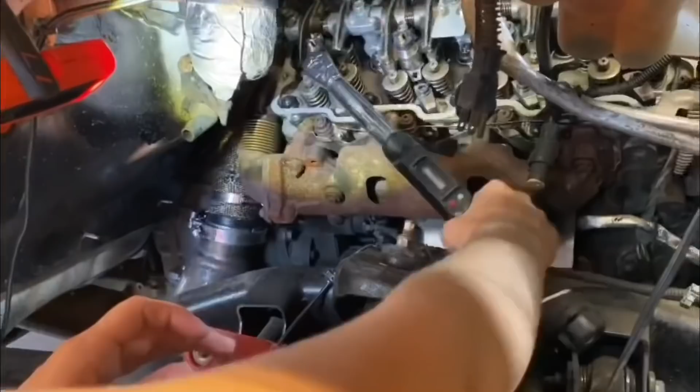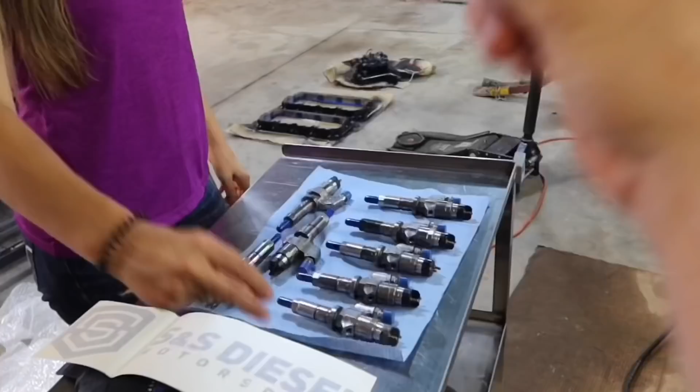We're gonna go ahead and get you guys up to speed really quick. We installed the 100 over S&S Diesel injectors. What that means, guys, is I basically took my old injectors out of this truck. I went ahead and purchased 100 over SAC injector nozzles from S&S Diesel as well. And what I had them do essentially is take those 100 over nozzles and put them on my injectors.

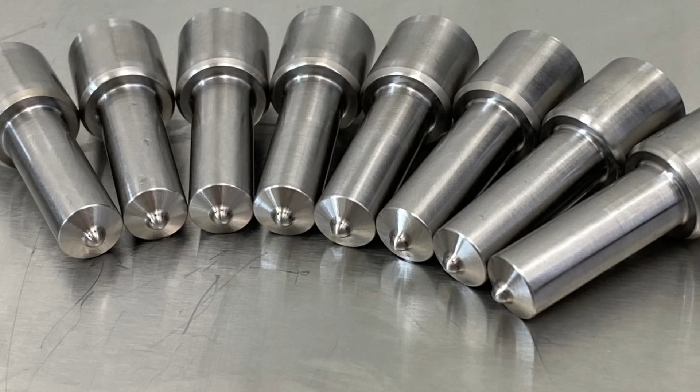We're gonna make this sort of a learning experience, sort of a science experiment, so stay with me on this one right here. If some of this stuff doesn't make any sense to you, if it's another language, I think you'll still be able to take something out of this, especially for you diesel owners, or some of you guys that just want to put a little bit more power to your truck.

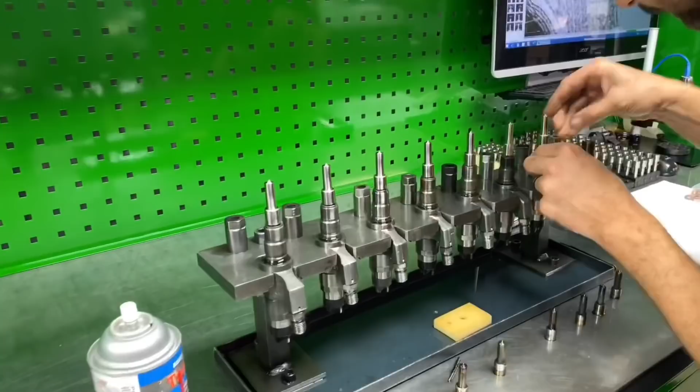So in most cases, a lot of guys just buy the injector nozzles and they just put them right on their diesel injectors and then put them back in their truck. Of course it's going to be more cost effective. Let's be honest, a set of nozzles are going to run you, mine were about $1,200. You're going anywhere from a range of $600 to $1,200 depending on the size of injector nozzles that you're trying to go with. Most guys just buy the nozzles, put them on their injectors in their garage, and then put them back in their truck. That's all fine and great, but I do question that right there.

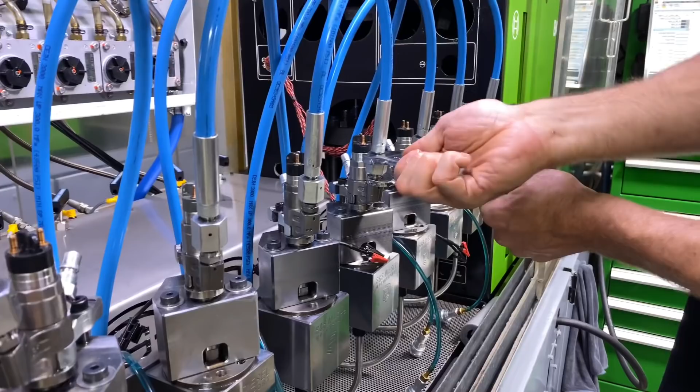So the team at S&S, those guys are so awesome. They were able to send me some footage from their shop, and I'm going to collaborate that here in this video and show you guys some of the data and science behind all of this. And is that even worth it?

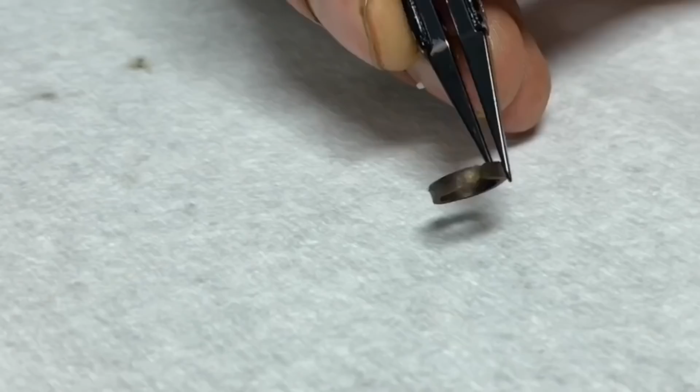Now, this is also a really good reason why you guys should not just install injector nozzles on your injectors and then slap them back in the engine. This right here is a cracked high pressure seal, and this is while they were actually rebuilding the injectors. They noticed that there was a crack inside the seal right here, which would cause a no start naturally. So this is a great example why it's a good idea to have S&S install the nozzles for you instead of doing it in your garage.

So watch till the end of the video, see the results. In real time, you guys are actually going to see the injectors that we ripped out of this truck right here, which is already put together, as you guys can see. And stay tuned for some more awesome videos on this one.

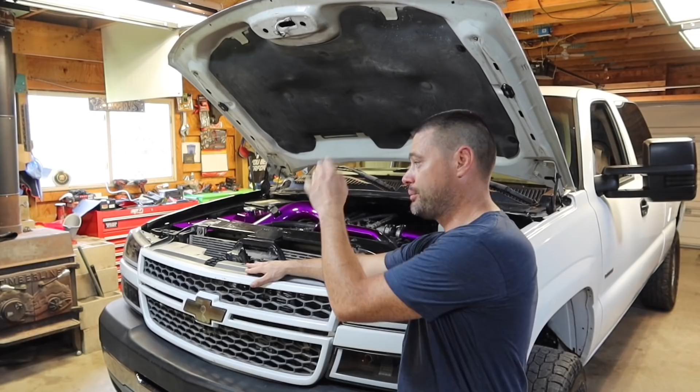In the end of the video, we're going to conclude: is it better to just swap them out in your garage and put them in your truck, or is it best to send them out to a professional, have them calibrate those injectors with the new nozzle tips, and remanufacture the injectors and bring them back to you? I know it's a lot more expensive, but is it really worth it?

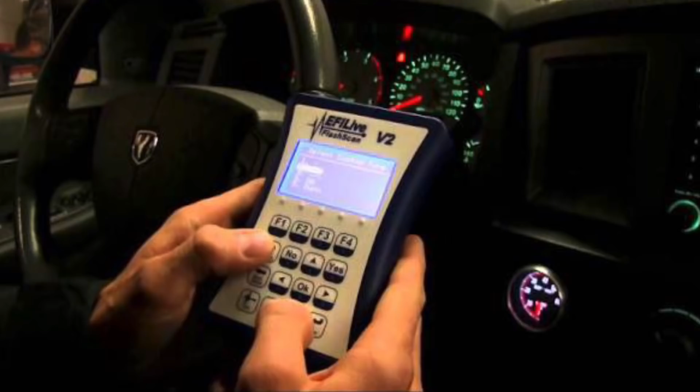In theory, producing more power by increasing fuel flow sounds simple enough, and there are two ways of doing it on most diesels. The first is electronically, by cranking up the tuner and letting the computer do the work for you. The second is by physically delivering more fuel by installing larger injectors or modifying the injector tips.

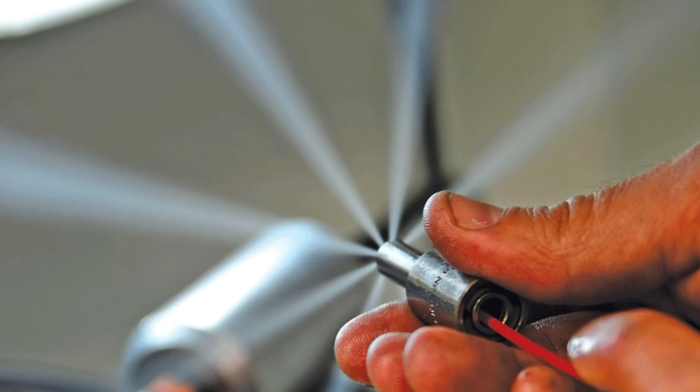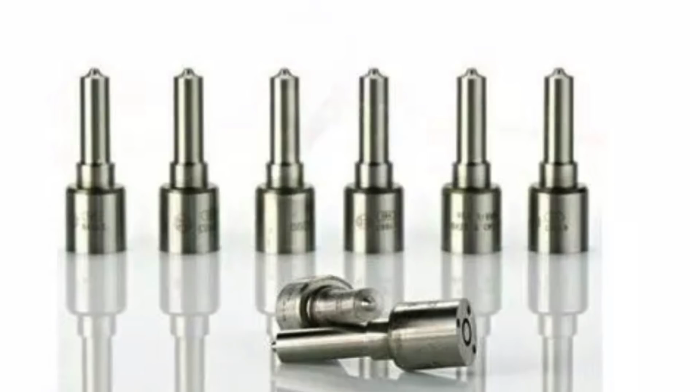It turns out that for the modest increase of around 100 to 300 horsepower, just enlarging the orifices in the injector nozzles might be sufficient, but when you start looking at higher levels, things get way more complicated. In addition to increasing the size of the holes, other factors come into play, such as the number of holes, the spray pattern, and spray angle, along with various other engine upgrades.

And then just really quickly, I do want to touch on the VCO and the SAC injectors. Here's the quick differences. A SAC style nozzle has more of a teardrop shape. A tiny cavity in the bottom of the injector feeds into the injector. A small needle at the end of the valve closes the cavity. The cavity maintains a small amount of fuel in the tip, which helps cool the nozzle and preserve longevity. On a SAC style nozzle, when the valve moves, the fuel cavity immediately fills with fuel and provides a crisp, cleaner injection.

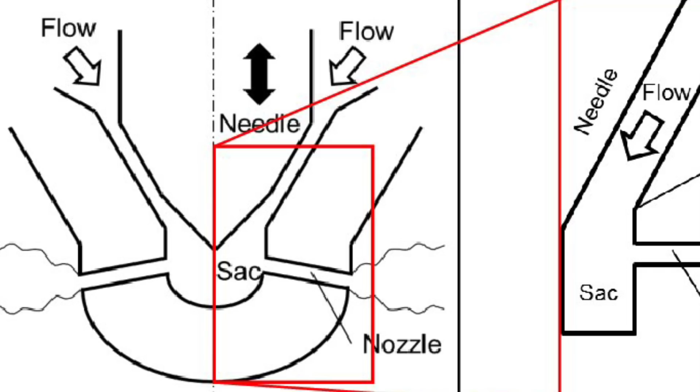And then the VCO stands for valve covering orifice. It has a moving needle inside the injector. This needle covers the holes at the end of the injector and causes a very clean end. But basically, as you guys can see here with the VCO, known durability issues, definitely hazy exhaust, obsolete design.

And then, of course, the SAC, increased injector lifespan, which is the biggest reason. The SAC injectors definitely make those, especially LB7s, make those injectors last a lot longer. Cleaner emissions, and then OE standard for the newer models.

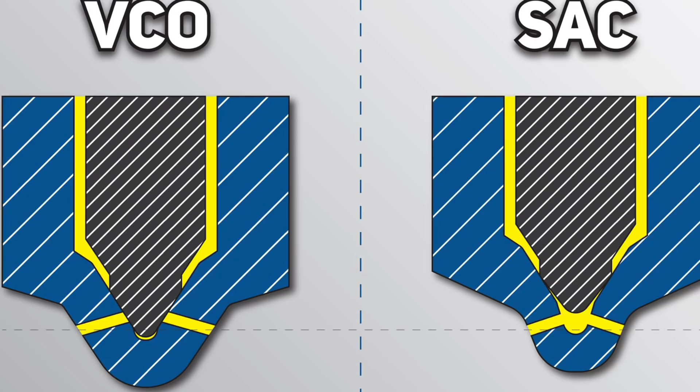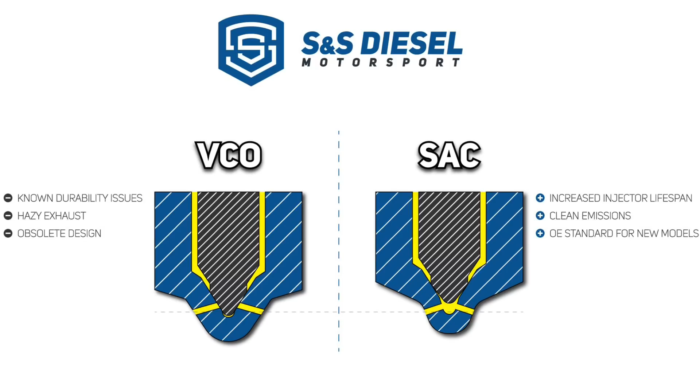Now that we've talked about SAC versus VCO, S&S created the SAC 00 specifically to address durability issues without increasing fuel delivery. And of course there's a lot more we can talk about with the benefits of SAC versus VCO. After all the research that I've done, I definitely say that the SAC 00 is king. That's definitely the one that you're going to want to go after. So that's what I went with here.

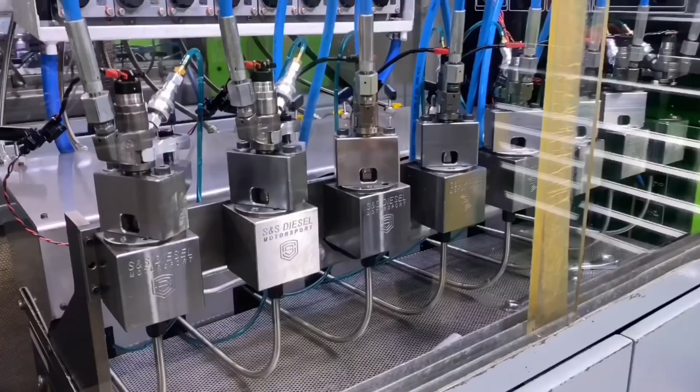I'm going to show you guys those clips right now in real time. Like I said, they're going to be testing my injectors as they are, and then they're going to put those new nozzles back on there. Now, I went with the 100 over nozzles, which are of course going to flow like crazy, which already do. We've already test driven this truck. Once they do that, they're going to show us the results. Without further ado, let's head over to S&S Diesel and stay tuned.

Hello, I'm Andrew with S&S Diesel Motorsport, and I'm going to go over the summary of the data, the Truck Master on YouTube's injectors.

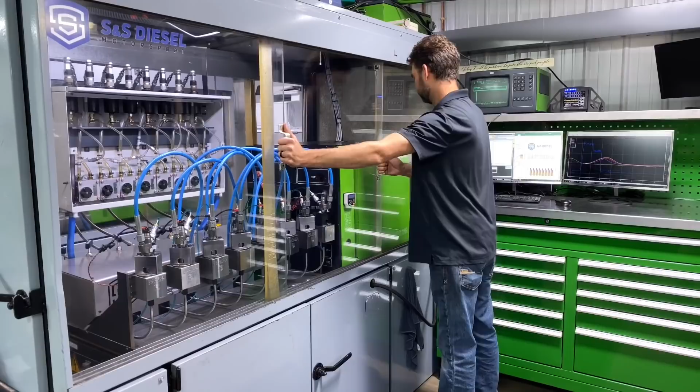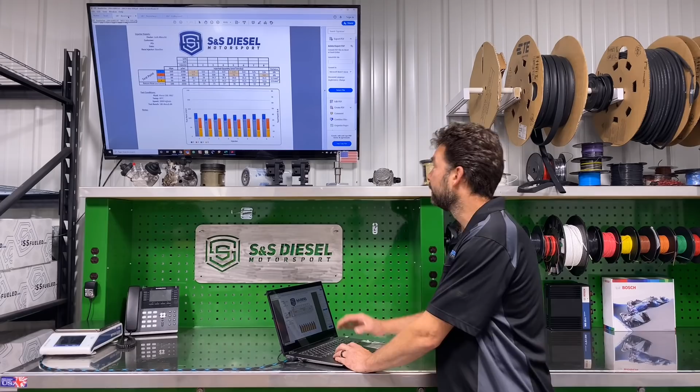Baseline here, you can see they were about 6% spread, not too bad in the bottom end. Because of the spread, you can see that they highlighted yellow in our sheet. They'd be within service specs, but outside of what our new spec would be. We did a straight nozzle swap to simulate what a lot of people do in the field that we don't necessarily recommend, just to show what that would do. There you can see that we ended up at an 8 and 9% spread at our two full load or high load points, and then 6.8 and 2.8 at the idle and cruising points.

These are remans where they put a non-Bosch fitting in that is not machined correctly to be able to spin that nut off by hand all the way. If you look at it, you can see poor machining quality on the inside, poor machining quality on the outside. We would not recommend whoever made those fittings. You can compare it to a Bosch fitting right next to it. It's smooth on the inside, good looking threads on the outside, and the nuts spin off and on, no problem.

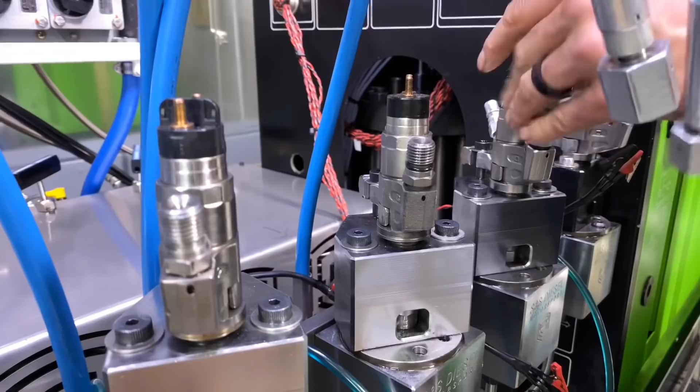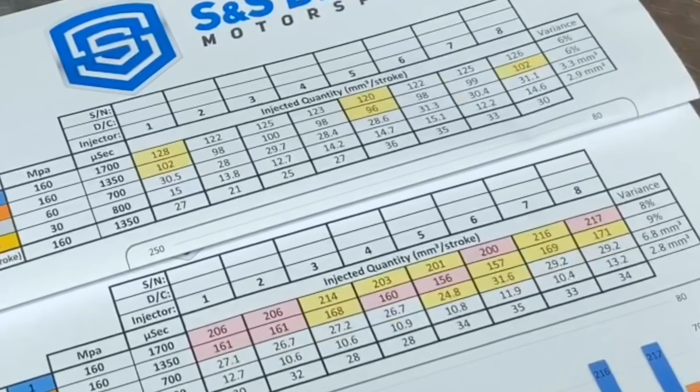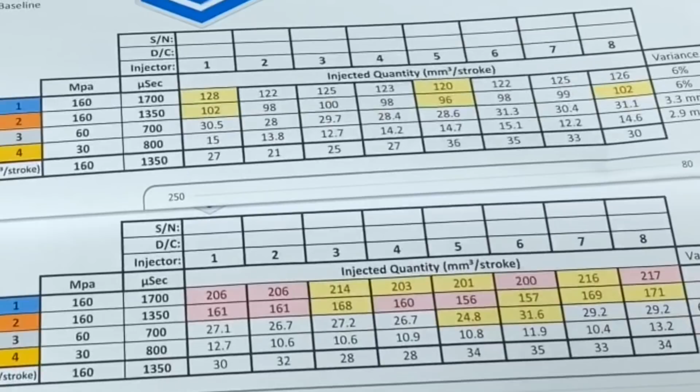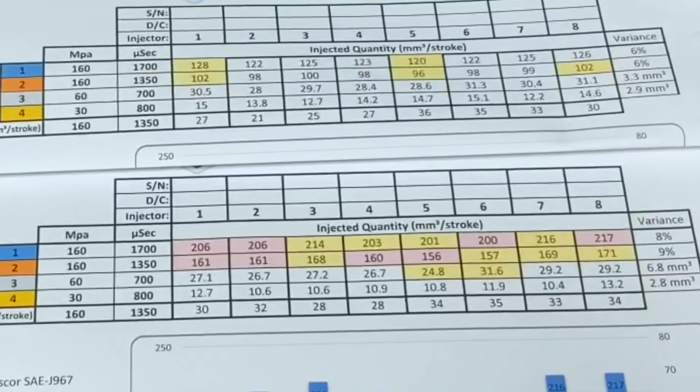Our baseline, because of the 6% spread, we've got a couple yellows, which means it's getting bad, but it's not necessarily something that you would have to replace, but it is not as tight as we would like to see them. If you look down here, the reason we have so many reds and yellows is dual reasons. One, because we have high spread, but two, because this is on our 100% sheet and they are not flowing where we want them to be per our spec. So they should be significantly higher on all of those.

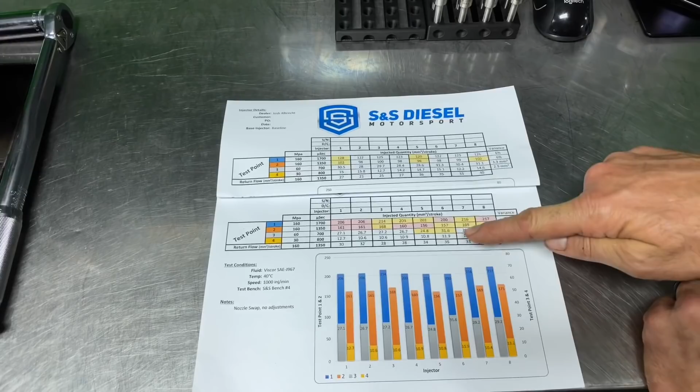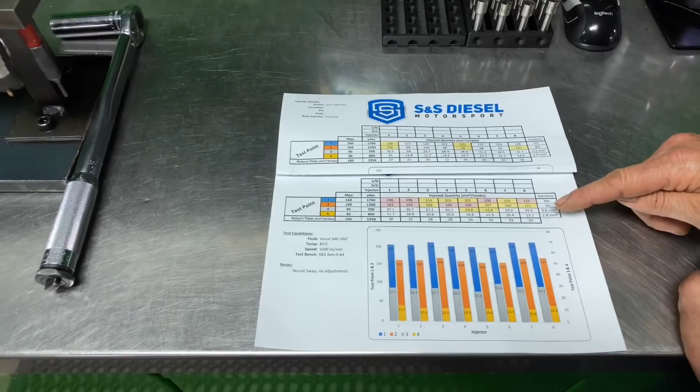And then we have yellows down here at the 60/700 point, which should be like a cruising point, and they're yellow because of the spread. We prefer not to have that much spread at that point. So we're going to look at where they're flowing at, who's high, who's low, and start adjusting. And because of the spread now, it became red, and also because they're flowing lower than our tolerance. So dual reason we have some red there. And after that, we went through and built them to our specs.

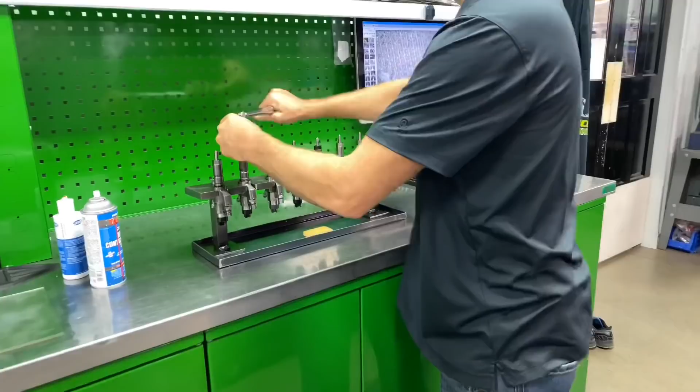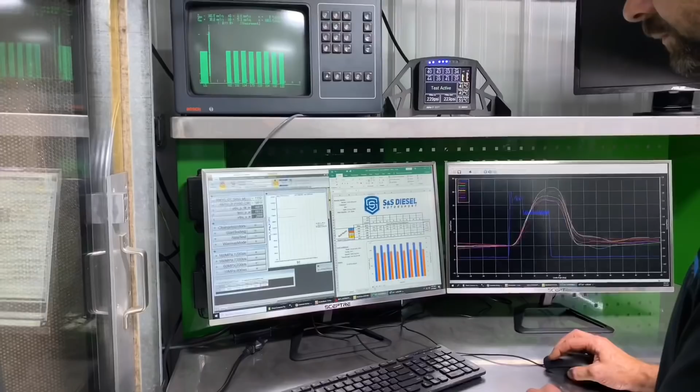Get the injectors built, basically set all the parameters we needed to adjust, get them to flow per our spec. Being that they are remans, they're not quite as good as if we had started with a brand new Bosch set, but they should be pretty close. You can see that guy's still high there, and then you can see the green one that we're similar to is still a little bit on the low side.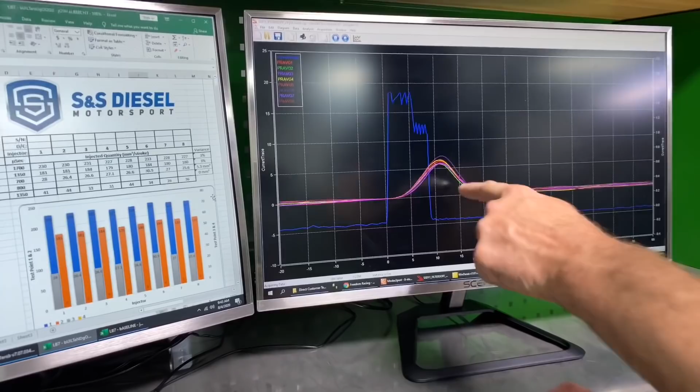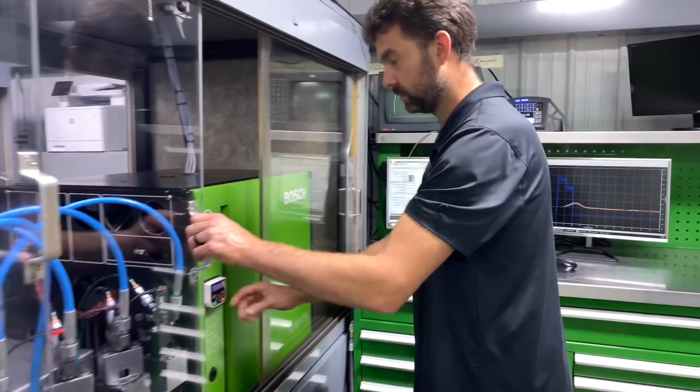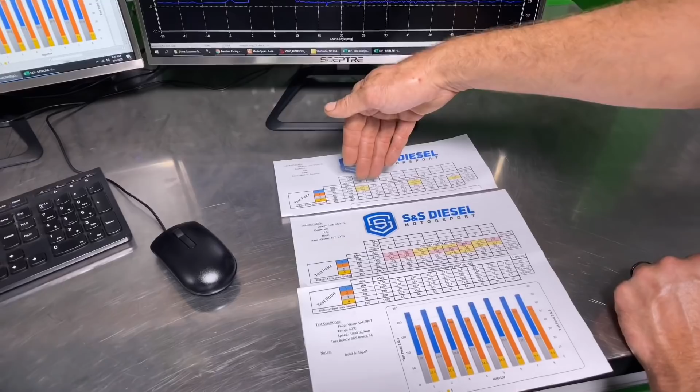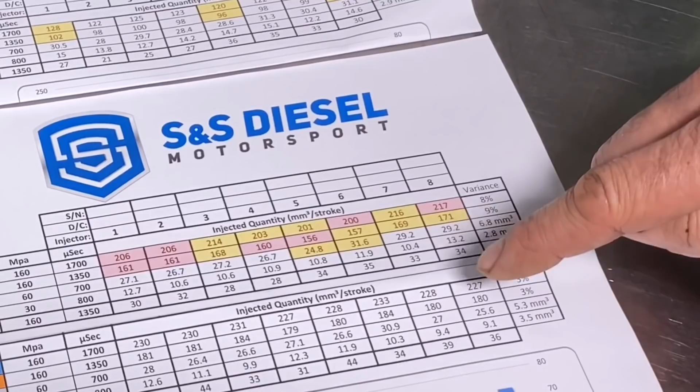Comparing the data from before initial nozzle swap and then after. Before, running 120-ish to 128 millimeters cubed per stroke at full load. Straight nozzle swap, our spread actually got worse at full load. We're running low 200s, 205, 210, probably 210 average. After build, we end up closer to a 230 average, so we're getting not quite a 10% increase in output with proper build specs.

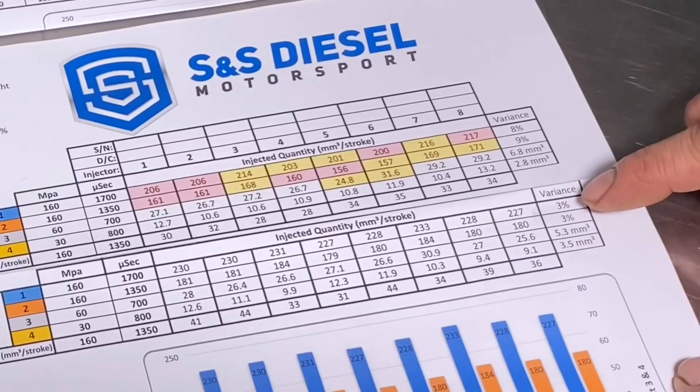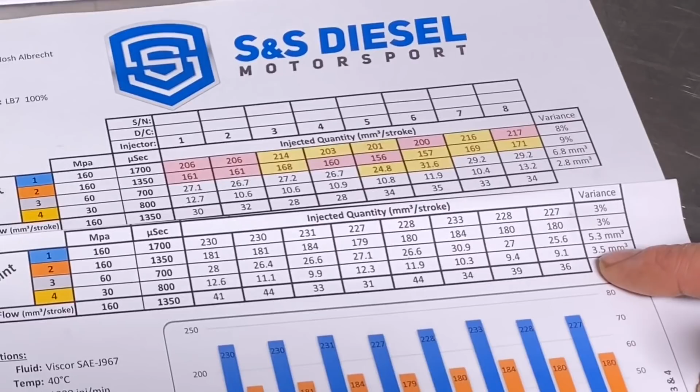You see that our variance is down at 3%. We're very happy with that. Our spread down at the bottom end, so idle point 30, 800, we have a 3.5. The reason that's a 3.5 is because we were starting with used injectors, non-Bosch remans, and it's kind of a cost-benefit analysis. How much time can you put into a used set to get them better? So I sacrificed a little bit at the idle point to drop that guy down.

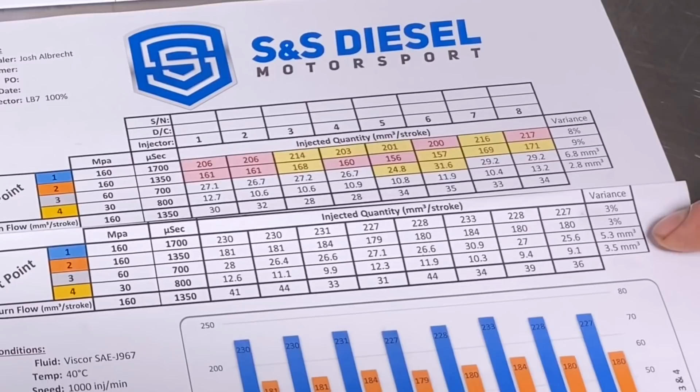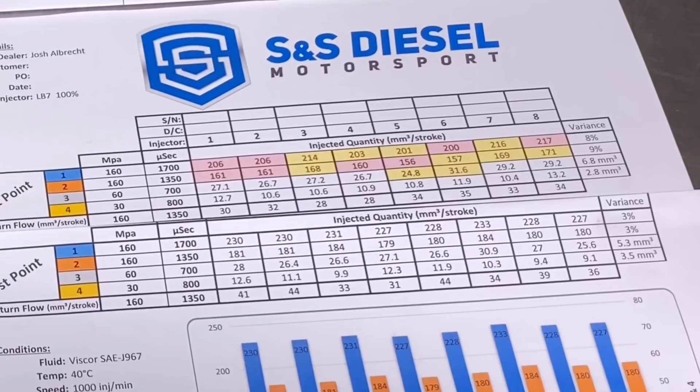You know, we could keep spending time on them and get them perfect, but how much time do you put into a used set of injectors? So at that point, I would expect a balance rate, assuming the engine's perfect, of like plus or minus 1.7, 1.8. So it shouldn't be bad at all. And see, we ended up with a 3 and a 3, and then a 5.3 and 3.5 for the bottom end. If we were doing a new build, it would be a little bit tighter than that, but because these were kind of a hodgepodge of injectors, there were various remans in there, plus some original Bosch injectors, so it's a lot more difficult to balance them when they're not new Bosch injectors.

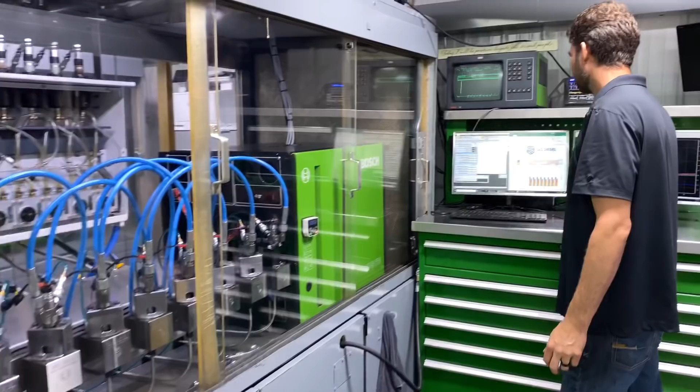The equipment that we used to test these was an in-house designed and built 8-station injector tester. So we run all 8 injectors at one time so we can compare the whole set together all at once. We did that so it would be faster for testing, so we can basically get more product through with high accuracy and precision, being able to see everything in less time. The bench is equipped with rate shape capability on all 8 injectors, so not only do we see the quantity, but we can actually see start of injection, end of injection, flow rate, and do a better job building the injectors.

The questions that Josh had for us on our nozzles is, why are they better than the competition's? There are 3 reasons that I would say our nozzles are better. Number 1 is our proprietary media that we're using. The media we have was developed for us, specifically for nozzle honing, to reduce the potential for plugging and to get better hole quality. Next reason would be our variance. Generally our nozzle sets are within 0.1% flow variance.

And the third would be that we flow with fluid like the OEs do. So we're using the Viscor fluid at 40 degrees Celsius, just like the OEs do, Bosch, Denso, Siemens, Continental. So we are flowing as you should on a nozzle, getting the data that you should on the nozzle.